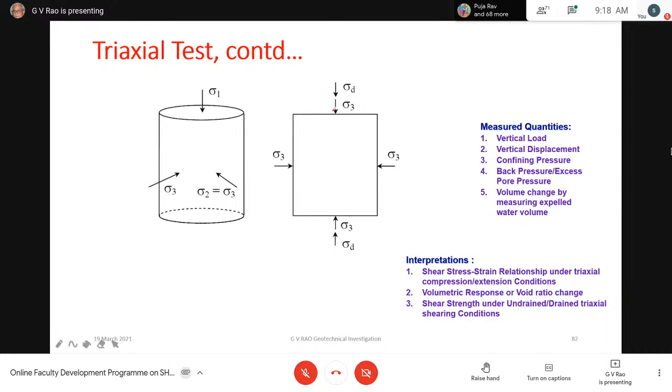So that is what we are going to look at basically. So when trying to do that now, we defined last time that we are going to have 3 combinations actually. The 4th combination is not feasible. You can think why the 4th combination is not possible.

But then, in the first stage now, we are going to have this undrained condition. That means pore pressure is still there, excess pore pressure is still there. And the second stage is going to be that we are not going to allow consolidation in the first case either. So this is what we are referring to as an undrained, unconsolidated test.

Results of which I have shown you yesterday, but I will also show again. That means till the end of the test, the pore pressures which are developed during phase 1 and phase 2 are going to remain there only. So this is a totally undrained case. Obviously, this is going to apply only to a homogeneous saturated clay.

Okay, that's very clear on this now. And obviously, we can't easily make a specimen of sand in the laboratory. So this applies essentially to clay conditions.

The second kind of test is, of course, what we are going to do in the first phase. We are going to first apply the cell pressure and then allow the excess pore pressure to be dissipated. So the sample is consolidated. We give adequate time for that. And then after that, we are going to apply the additional axial stress under undrained condition.

What we mean by this now - we are going to close the burette or the volume change measurement device and not allow the pore pressure developed in the second phase to dissipate, and we may choose to measure the pore pressure or we may not measure it. So it becomes a CU test when you're not measuring pore pressure. It becomes a CU bar test when we are going to measure pore pressure.

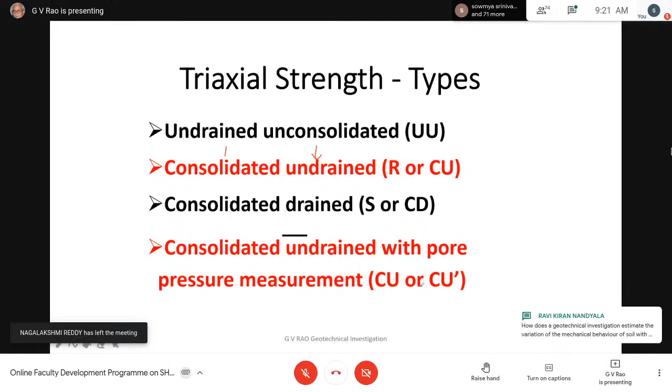We will recap again. We are going to use the Mohr Coulomb concept. We have a linear relationship between sigma and tau. What are we defining? We're defining the slope of this line by the equation tau f equals c plus sigma tan phi. C becomes the intercept on the vertical axis, the tau axis, phi is the angle we are measuring, and sigma is the pressure or stress we apply.

What I mentioned yesterday and repeat again is that these are only strength parameters, not a reflection of actual cohesion which may occur in clay - that it sticks to your hands - while phi is not meaningful in clay. These parameters are strength parameters determined under different drainage conditions, and we should not relate this to the friction between sand particles or the adhesion between clay particles.

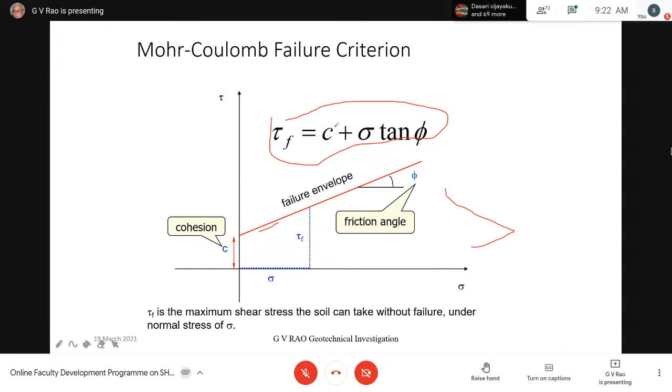It is only strength parameters, determined under total stress conditions or effective stress conditions. That's what we remember - I think this is the most important criteria. C and phi are measures of shear strength, designated as strength parameters, either effective strength parameters or total strength parameters.

Obviously, if the values of C and phi are higher, it means higher shear strength. That is obvious. So the first case we determine is what we call saturated clay, let us say.

In this case, we are going to initially assemble a sample at a confining pressure of 50 kilopascals and conduct the test, plotting the failure value of sigma to get a circle like this. We can conduct a second test at a confining pressure of 100 kilopascals and get another circle, and a third test at 200 kilopascals. So this is the result.

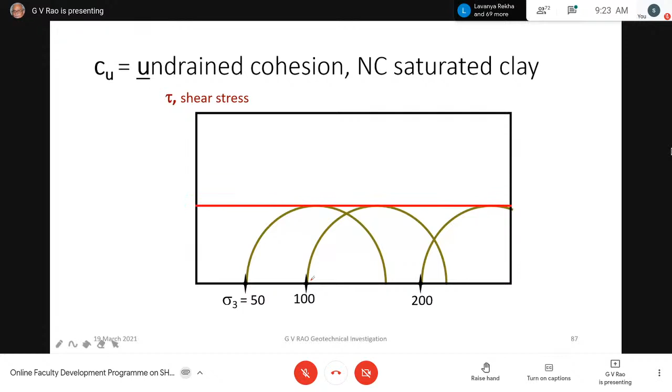Mind you, in this UU test, we are not measuring pore pressures - everything we measure is in total stress conditions. So in these total stress conditions, we plot a common tangent between all the circles. This common tangent is the failure envelope. First, it's horizontal, so the value of phi is really 0. Then there's an intercept on the y-axis, the shear axis, so the intercept is given as C.

Now the second thing we thought about was what would be most accurate when we conduct an unconfined compression test on the same kind of clay. Once you apply no confinement - no cell pressure, zero - you are testing at sigma equals 0.

When you conduct such a test, surprisingly we get a circle of the same diameter, which means the intercept we get is simply a value of Cu, which is the same in all cases. So that is what we remember always - conducting this test naturally gives a phi value of 0 and C is positive.

We also mentioned that we can conduct a similar kind of test in the field using a vane shear test. The vane shear test is also done in a few minutes - we rotate the vanes and find out the strength. There too, whether laboratory or field, we're not going to do any more consolidation; whatever is there in the field, we take as it is.

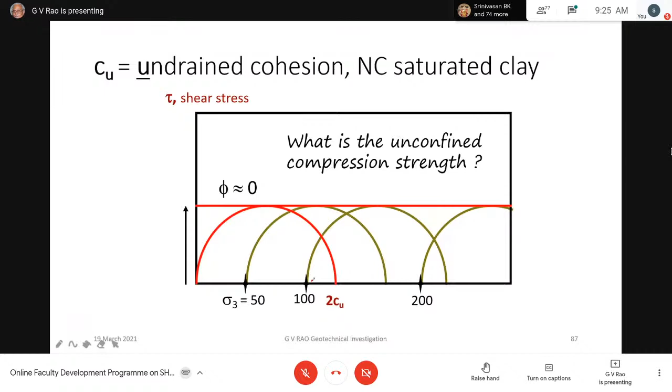We're going to run the test in the field, meaning in the natural condition. That means the effective overburden pressure remains whatever it was there. The test is done in a few minutes, so there's no chance for any excess pore pressure to dissipate. So that gives us the value of C under undrained conditions - that is the undrained cohesion.

This can only be, as I said, total stress parameters. So this is very clear for us now. For saturated NC clays, meaning normally consolidated clays, phi is equal to 0, and tau peak is going to be Cu. In the early generation, people used to call this value S, capital S. That also we use when you go to bearing capacity, so that is very important for us.

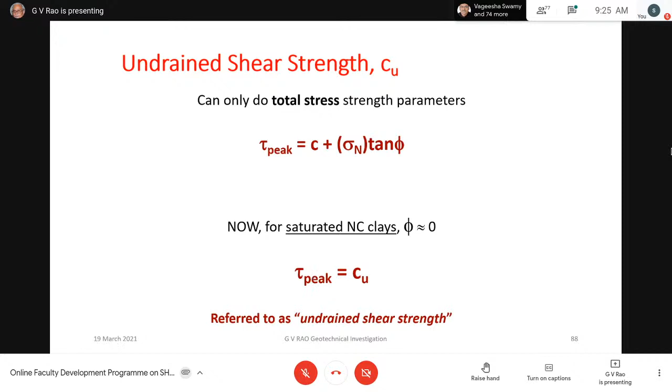Now on the same kind of soil, if you conduct a similar test, but a CU bar test - when you conduct a CU bar test, the first phase is consolidated, second phase undrained. That means in the second phase pore pressure is generated, but it's measured. When you plot this under effective stress conditions, we find circles of different diameter.

Why does this happen? Let us say we had a confining pressure of 200 kilopascals, and during the test there is pore pressure generation. But before the test, before phase 1 is complete, the sample got consolidated under 200 kilopascals, here at 100 kilopascals, and here at 50 kilopascals. So with higher confining pressure, consolidation is over in the first phase itself, and the second phase only has excess pore pressure generation. We can plot these values perfectly, and then we find that the common tangent - the Mohr-Coulomb envelope - is going to be a line.

In this line, we find that the intercept is going to be nearly 0, for the same soil, same clay soil. So what we find is that there is a phi now. Can't we say that the clay has no cohesion and there is a phi? We should not think that clay doesn't have friction, because C and phi are only expressing strength parameters - this is what we have to remember.

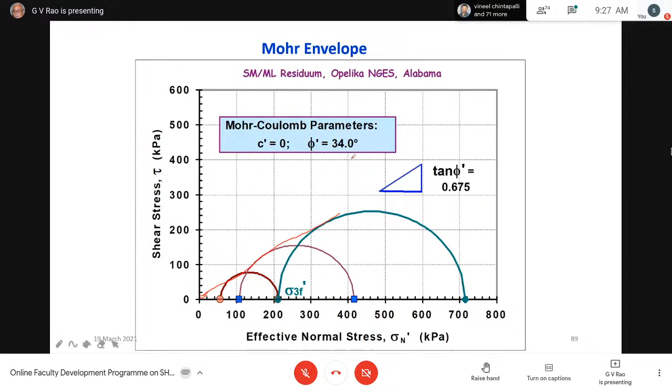In the same way, we can also plot the total stress plots - no problem with that, but it comes out different. So this is what we are going to remember: for the UU test, we have got Cu and phi U equal to 0. For the CD test, everything is drained only, there's no pore pressure, no excess pore pressure there. So we are going to get only effective stress parameters called C prime and phi prime - this is very important for us.

To repeat: granular soils will not have any cohesion, C is 0 and C dash is 0. In unconsolidated undrained test in terms of total stress, phi is 0. And for normally consolidated clays, C prime is 0 and C is also equal to 0.

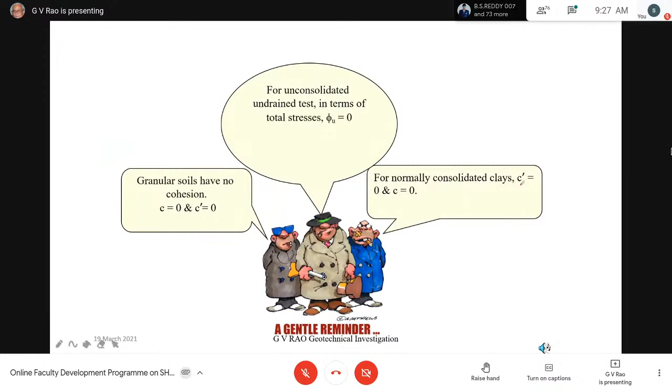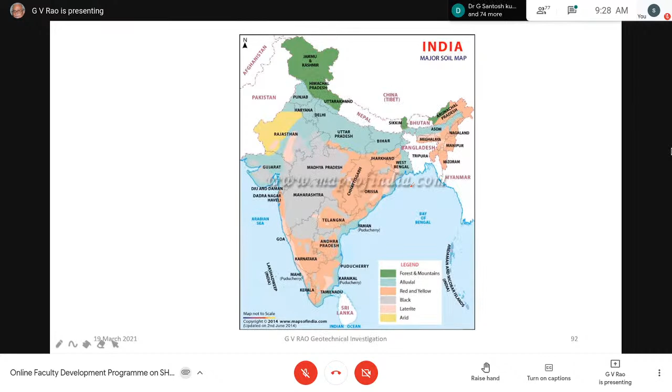What we should remember is that in our huge country, we have different kinds of soils. Each one of you should have some exposure to the properties of the soils in your region, and you should make an opportunity to bring samples to the laboratory. Just to see for yourself whether you get consistent results or not, you should try this for the soils around you at different depths and variations, to get a physical feel of what we're trying to talk about.

In the beginning, people used to think that we will just drill a hole in the ground, send the soil samples obtained from the hole to a laboratory with standardized apparatus served by what people call conscientious human automatons - meaning they are doing the test perfectly, there's no problem doing it. But then we just collect the figures, introduce them into equations, and compute the result.

Unfortunately, as Karl Terzaghi, our father, says: unfortunately, soils are made by nature and not by man, and the products of nature are always complex.

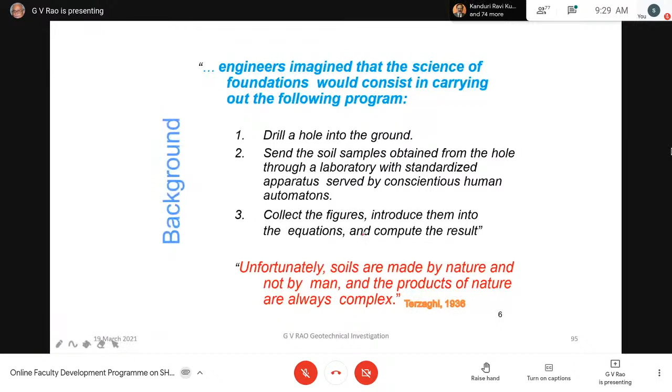Just merely doing the test mechanically and putting these values in the equations will not make any sense at all, because there are several things between the cup and the lip. I can show many instances where things were perceived in a different way. It could be our own analysis of things, our own way of thinking, or it could be that we have to keep our eyes and ears open about the performance of different kinds of structures in our area, about which we'll talk more as we go further.

From these values, we are trying to obtain what kind of load we are going to have for a foundation structure of different size, different dimensions, different depths. We have very crudely seen that when the load is distributed very near the bottom of the column, or very near the surface, it's called a shallow foundation. We'll have clear definitions of that anyway. But as a rule, the shallow foundation is going to be more economical.

For example, if some of you have gone to IIT Delhi, all the major structures up to the 7th story were all on shallow foundation only. Today you can't think of a 7th story structure on a shallow foundation, but that was the situation. I think nowhere in IIT do we have a deep foundation - they are all just shallow foundations, even the major structures.

The other thing I want to share with you: when I went there in '75, in the main institute area there was a huge car park, well paved. After some time, probably in the early 80s, the institute decided we are going to have a library building there, a 4-story library building. But every library building is always heavier than a normal residential building because the books are very heavy - the stacks of books make it very heavy.

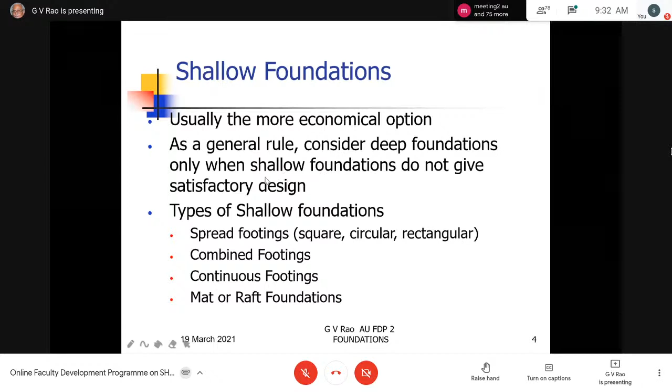This is something we have to do. So before we take a call on what kind of foundation we are going to have, we ought to know the depth of the natural strata that was there and how much is filled or how much is cut. As a general rule, we consider deep foundations when shallow foundations are not giving a satisfied design. So in a shallow foundation, students usually look at some structure like this, but it could be a rectangular foundation, it could be a strap foundation, or it could be a mat foundation.

For each one of these cases, we get different kinds of parameters. For example, in this case, there's a relatively high ratio of soil resistance to structural loads because the area is more. The resistance, the allowable bearing load is going to be more actually, since the area is more.

When the actual bearing capacity of the soil is smaller, we naturally adopt a much wider foundation, a raft or mat, whatever you want to call it. These conditions come about due to resistance, but they're also common. For foundations of tanks, we have ring foundations too.

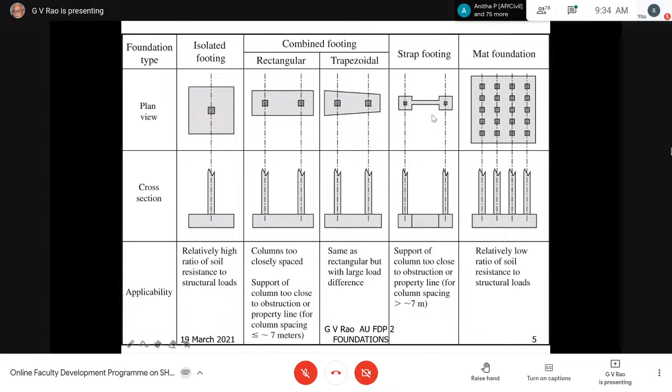So the kind of structure, the ground conditions, and availability of land next to your boundary are going to influence the kind of foundation. We often look at isolated footing or continuous footing like a compound wall as the common things, but these so-called uncommon things are also very important, and sometimes we need to use judgment in deciding the actual bearing capacity.

So the foundation choice is going to be guided by the subsurface soil, the groundwater conditions, and also structural requirements—all three are important. We can know the subsurface soil conditions and groundwater conditions by doing investigation, but the structural consequences are equally important for us.

That means before giving a decision on the recommended load which the soil can take at different depths of foundation, it is important to understand what the architect or designer of the building is planning. Has he got individual footings, continuous footings, a raft, or a deep foundation in mind?

For example, we may think, as we did at IIT Delhi, that even a 7-story building can be on a shallow foundation. But the architect or designer might have something else in mind—a deep foundation. Once they have deep foundation in mind, while I'm only thinking shallow foundation, my depth will be restricted to maybe 1.5 times B. But if deeper foundation is needed, we need to go much deeper.

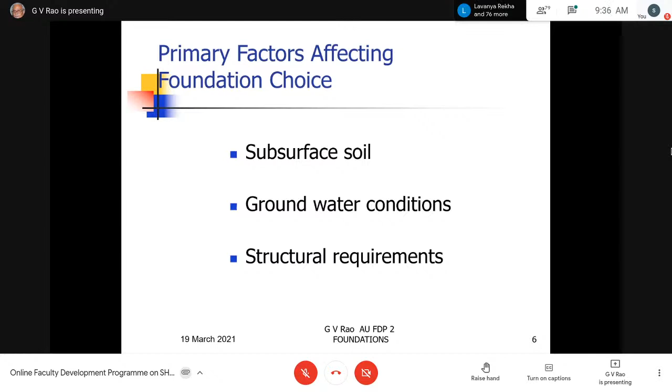What's more important is, once the actual user of your data decides upon deep foundation against your wishes of shallow foundation, are we going to go back to the site and do investigation again? No. So we have to know the mind of the architect or client, and the structural requirements, like how close the spacing of columns is, whether there are heavier columns than normal, like staircases or lifts. These things ought to be known well before the investigation, and definitely before giving the allowable bearing pressure.

We know that three things are most important for a successful foundation. From a pure soil mechanics viewpoint, bearing capacity and settlement—these are two things we all do. But the third factor, the number of other factors, these are called nebulous factors.

For example, if you're looking at a structure like a pump house next to a canal, river, or pond, scour may become important. If you don't consider scour, you are gone. Similarly, there could be godowns like cold storage, which is going to completely change the soil profile—it's going to be frozen. So we get a different kind of issue when we open it up. The point is that this third element is nebulous.

Yes, in all our books now, we got a lot of conditions. I will also show you the conditions given by our IS codes. But this list is never complete unless you are able to understand the total situation in and around the proposed structure and the experience of the neighborhood. This is going to be sometimes more crucial than determining your bearing capacity.

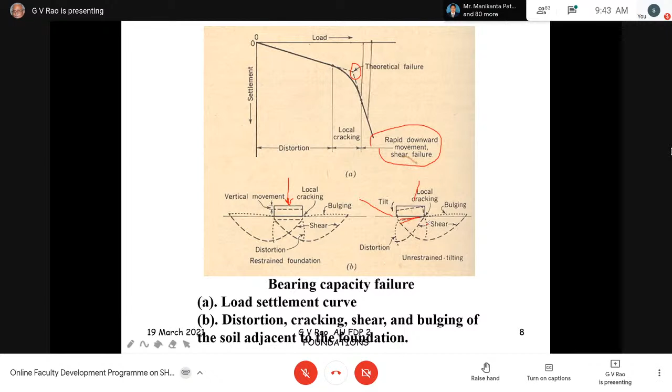And what is the final result of all this analysis is going to be that this wedge which is going to form, which is punching into the ground, is assisted by the friction around this wedge portion, and also by the vertical component of the earth pressure which is going to be generated by this entire zone, what we assumed as a failure zone.

So it is clear that this failure zone is divided into two zones. One is radial shear zone, and then a linear shear zone. Linearly there is no problem at all, but the shape of this radial shear zone is what we can imagine, and different shapes can be imagined. We can imagine this inclination to be different. So all the theories differ in this only.

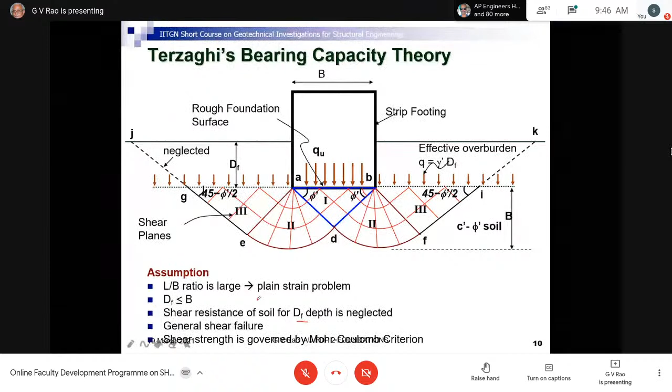So there is general shear failure because the entire soil around the depth and width participates in the load distribution of the columns or the foundation structure, and the shear strength is governed by the Mohr-Coulomb criterion. So with this is the foundations. What has he done?

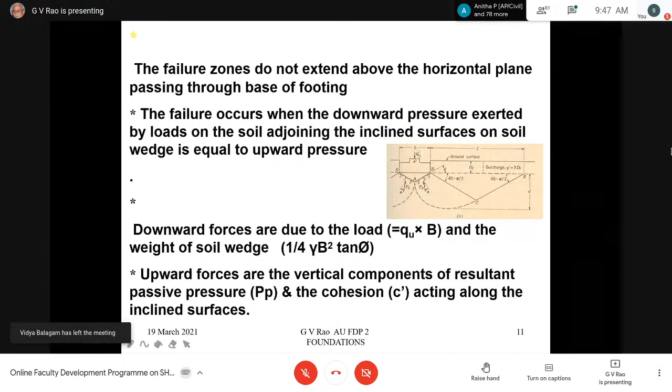This is what I have repeated. So the same thing we have tried to do: the failure zone doesn't extend beyond the horizontal plane, and failure occurs by downward pressure exerted by the loads that I mentioned. So finally, we can just draw the equation for the load bearing capacity because we have two zones now.

We are talking of the vertical component of the earth pressure, which is PP, the passive earth pressure into relevant angles, and then also the cohesion along the conical or wedge portion, and the appropriate values are taken after the geometry is set up like this.

We know that this length AB, this side, can be decided by the width of the foundation as well as the angle which you are trying to pick. So we put this equation for the load bearing capacity like this, for the total foundation.

This PP value, the passive pressure generated by this entire zone, is divided into three components. This is the most significant contribution which Terzaghi made, which is followed by all other theories, whether it be Terzaghi, Vesic, Balla, or Hansen, everybody followed that. So this PP component is divided into three terms.

One is PP gamma, which is due to the weight of the shear zone ABEC, that entire zone we are talking of. Then Ppc is the cohesion along this. And then Ppq, q always referring to surcharge, is the term referring to the surcharge here. So the passive pressure components are three: due to the weight of the zone, due to cohesion, and due to surcharge.

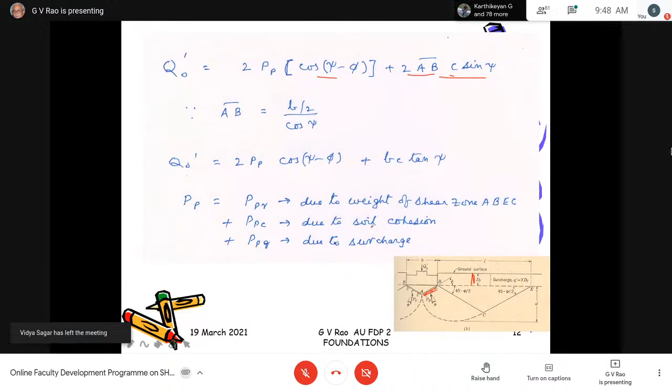If you put those things back and divide to get the unit bearing capacity, divided by the ultimate bearing capacity and divided by the width, you find we divide the same thing into the same components, and finally arrive at an equation simplified, for mathematical purposes, as gamma B by 2 into N gamma plus C N c plus q N q.

So now we realize that these values of Nc, Ngamma and Nq actually represent the passive pressure, and they truly depend on, one, the angle of friction of the soil below the foundation, and also the geometry of the failure zone.

Okay, and by the way, they are determined, and you find that they are obviously dimensionless. So the differences between different theories occur because of the various shapes assumed, shape of this entire zone, and shape of this entire thing, the angle here. Now people have assumed different values.

Brown has done a lot of work in this area. We're not going to use this equation directly, but Q ultimate is equal to QC for cohesion, then QQ for overburden pressure, and Q gamma for unit weight of soil. So the same thing is represented in a different way. This is what we have to see.

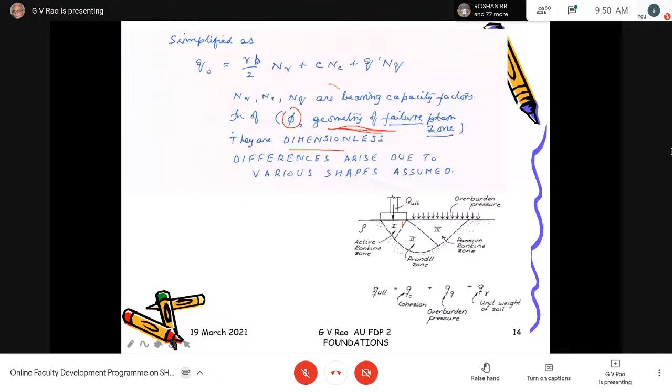There are three components for the ultimate bearing capacity: due to cohesion, due to overburden, and due to the weight of the soil. It's important to note equations like this exist. These are simplified slightly, but the NQ and N gamma, NC are functions of only phi. Of course the shape also matters, but I'm just showing the original equations, which give you a feeling for why they are functions of phi and the shape.

Here are Terzaghi's equations. The other thing we'll keep discussing is that you can always plot these bearing capacity factors versus the angle of internal friction, or angle of shearing resistance as we call it. What is it we are going to find out?

We find that if you think of the undrained case, undrained case means only C is there, so it is only C and Nc, nothing else. So you find that now, for both C and phi, this entire curve comes into picture.

When is the soil going to have both C and phi, effective C prime and phi prime? When the soil is actually over consolidated, which is very rare. If the soil is over consolidated, we'll have effective cohesion and effective friction also, so the angle of friction will come into picture.

The range of these values are also given here. Most commonly for the undrained case, it is this value we are going to use, because the undrained case for normally consolidated soils is always going to have no phi at all, mind you this. This is going to be a very uncommon situation - an over consolidated soil is uncommon.

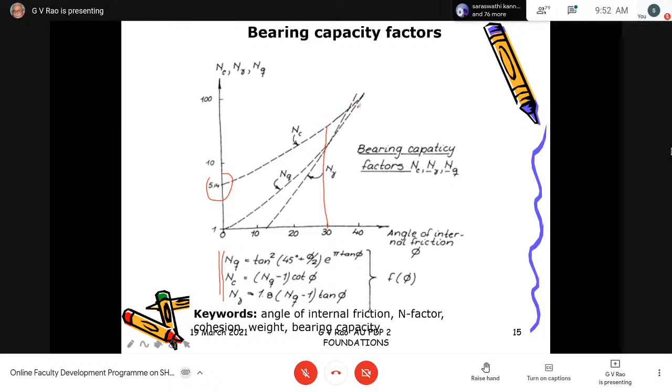We'll see this. So this equation here is derived for a strip footing. We have seen that. So for the strip footing, we got the same equation written in a better fashion. We got effective stress conditions shown in this case: C prime Nc plus gamma Df and NQ plus half B gamma and N gamma. So we've seen what these things are now.

And what Terzaghi suggested, of course all of you know, he suggested values which are different. The coefficients here are different for square footing and circular footing. So instead of 1 here, he used 1.2 for both of them, and instead of 0.5, he suggested 0.4 for square and 0.3 for circular footing.

How did he suggest it? Just by experience. Based upon experimental results, he has done this kind of calculation. Obviously, today we know that they refer to the shape - we call them today shape factors. So shape factors were introduced for the first time. He didn't bother about eccentricity.

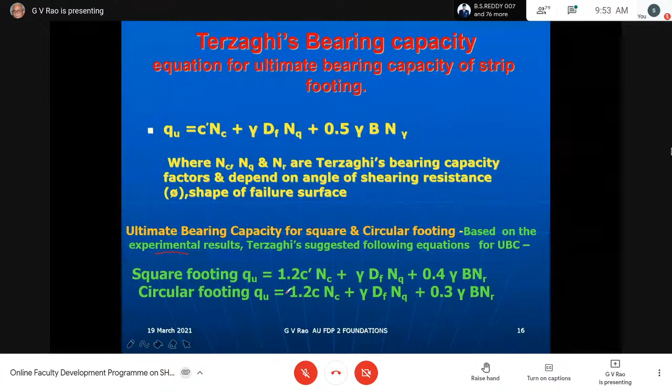He didn't bother about other things, but he did bother about the shape. He found that the equation used earlier was not suitable for square and circular footings, so he modified them as far as shape is concerned. The most important aspect to recognize is that the calculation of these things is very simple actually.

This is what is going to be most important to us. By assuming just 30 degrees, by any kind of test converting the SPT value into this and ultimately reporting 30 degrees, is meaningless, because even half a degree change is going to improve the bearing capacity factors significantly. This is what you have to realize clearly.

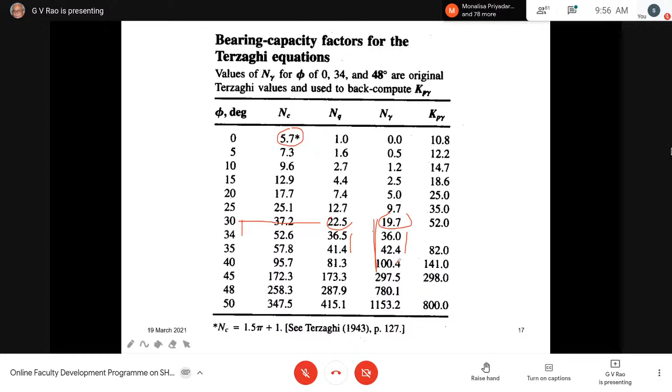The second thing brought out by Vesic much later is that we have seen the twin shear failure zones. That zone actually takes up the entire soil into the limiting equilibrium condition, because the bearing capacity theory is a limiting equilibrium condition. He said this may not always occur, so there are two more conditions specified: local shear and punching shear.

So what did he do? In general shear, we get the entire zone having the failure planes. But in local shear, the zone is not completely formed, it seems to be settling and developing only in a nearby area for these failure planes. In the case of general shear failure, we find there's a kind of peak value, and then it may reduce and become constant.

But here now, it seems to be settling disproportionately. We also have punching shear, which we will see later in more detail, very similar to this. Maybe it actually completely goes down, not mobilizing anything in the neighborhood. So here also the failure, ultimately, could be almost leading to failure now.

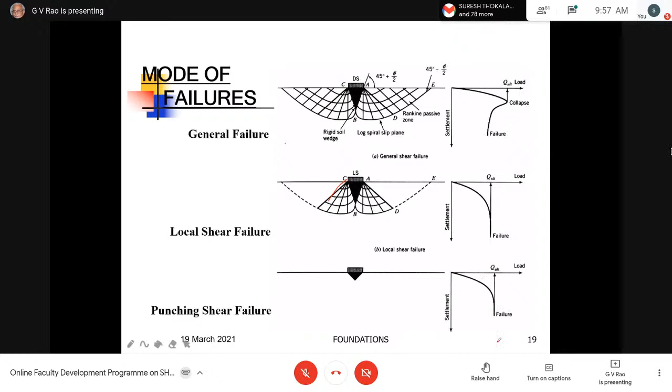Here, the entire soil is fully in the load bearing mechanism, because these failure zones are fully developed. Here, they are not developed, only restricted to this zone, and here restricted to only this zone. So this is the difference between the different footing tests he has done.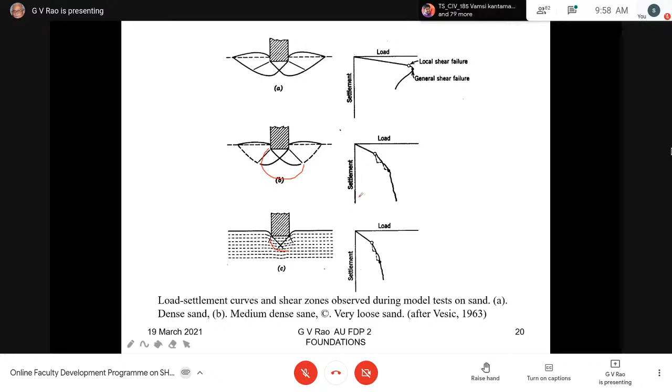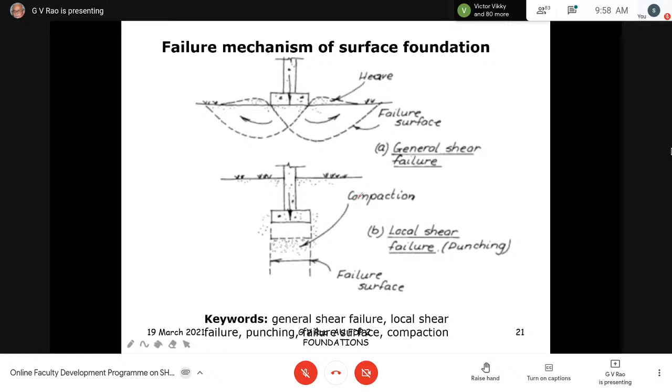Based upon this, he gave a theory. But today, we consider both the local shear failure and punching failure as the same kind of condition. So as per our IS code and our understanding, we consider only general shear failure and local shear failure, which includes punching also, meaning the foundation is settling disproportionately without mobilizing the soil on either side completely.

That is what is specified by the IS code and followed by everybody else now. So for this condition, he said we will not use the full value of C. We actually use the value of C, which is only 2/3 of the C we calculated in the laboratory. Same way, the tan phi value for local or punching shear failure is only tan phi equal to 2/3 tan phi, phi being what we got by testing. And this correction roughly is going to be 2/3 of this.

So for loose sand and silt, this condition applies. Now this is very generic also, it depends upon many kinds of things. What is suggested is something like this - what you observe and what is suggested is like this.

On this axis we have the relative density of sand, and on this side we have the relative depth of foundation, that is D over B, where D is the depth of the foundation and B is the width of the foundation. Under conditions of high relative density, this ratio D/B is going to be around 5. These cases are all going to be general shear failure, then local shear failure, and then in the zone where relative density is very poor, naturally it's punching shear failure.

So we are looking at this kind of estimate today. We don't talk of all of them now, we go to direct decision making.

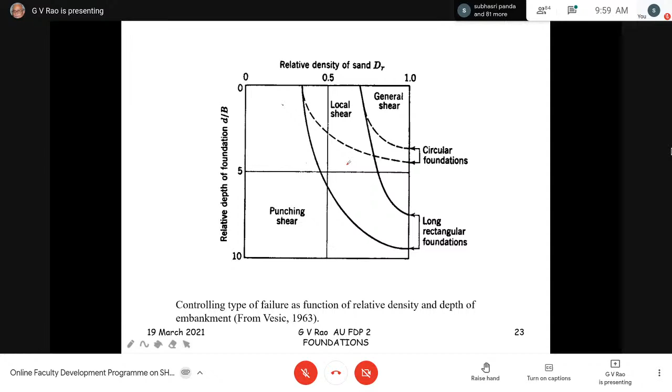The other important thing is about the presence of water. Water table can be anywhere when you conduct the test, because you may conduct the test conveniently in summer, when the water table is quite deep, and then in monsoon time the water table may rise. So if water table is rising, there is a question of change in the effective unit weight - are we going to use the normal bulk unit weight, or the submerged unit weight? This problem always comes up.

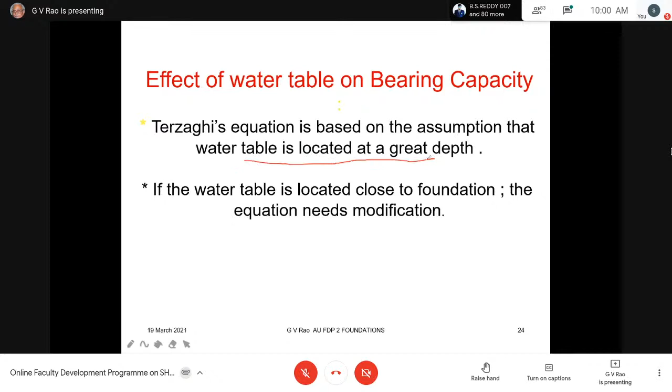So in the beginning, we have to remember that Terzaghi's equation is based upon the assumption that the water table is located at a great depth. That is very important for us to realize. So the correction for this is very easy. If the water table is very deep, at a depth greater than the width of the foundation, naturally there is no influence.

If the water table is, let us say, around here - what do you mean by this? This parameter which we use for this soil will be different, it will be a submerged unit weight. And the parameter we use for the soil above, the surcharge, is going to be the same bulk unit weight. If the water table is somewhere in between, we will have to do adequate correction, trying to linearize it, assuming the changes are linear. But fundamentally what we are trying to do is recognize that if water table is down at a depth equivalent to the width of the foundation, naturally there is no limit effect at all.

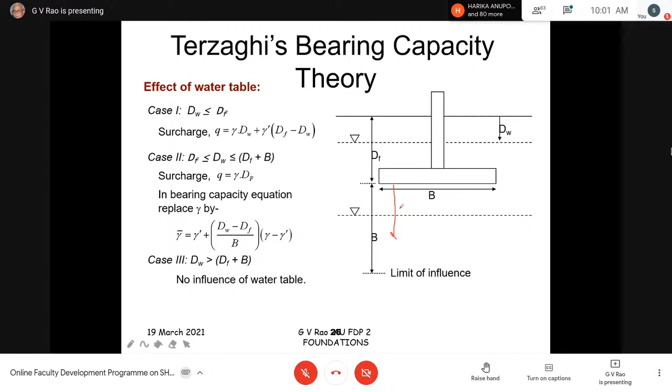That means we use no correction for water table in that case. If the water table is at the foundation level, we use a submerged unit weight for the parameter in the half gamma B term, and for the Nq term we use the full weight. If the water table is anywhere in between, we use linear interpolation for the density, as given by the equations. These are the correction factors we will have used.

The other most important thing coming out of this is that what we get from these equations is what we call the ultimate bearing capacity.

Ultimate bearing capacity means the gross pressure at the base of the foundation at which the soil fails in shear. That means the pressure we can apply at the depth we are assuming. We assume only in the beginning; the depth is assumed initially. The minimum depth we know is 1 meter, so we assume the foundation is placed at 1 meter depth now.

So what load are we going to place on this foundation? Clearly, this weight will include the weight of the soil, because we have a column and the neighborhood is going to be filled up with soil only. So first we consider the effect of that soil, the overburden above the base of the foundation, which is included in the ultimate bearing capacity.

So net means the additional load you can place, which means from this ultimate bearing capacity QU, we subtract the overburden pressure, gamma Df. That is called QNU, net ultimate bearing capacity.

So then the safe value comes when you divide this net ultimate bearing capacity by the factor of safety, assuming between 2 and 3.

Okay, then what is the gross bearing capacity now? That means how much you can place naturally. Whatever we got out of the net bearing capacity, plus this overburden pressure, which is going to be there. Now you have to be quite careful about what kind of foundation you are going to use. I'll come back on this issue later.

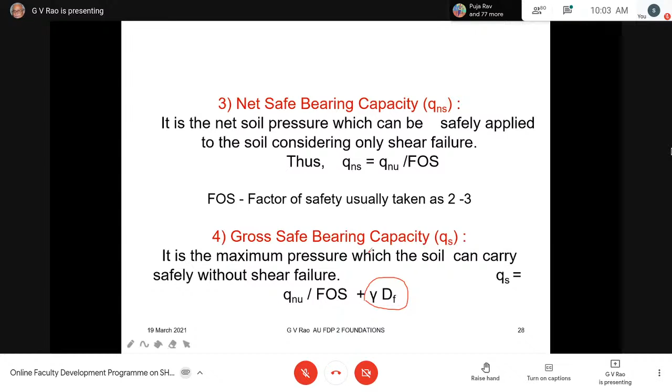Right now, the gross bearing capacity means how much load you can place, given by the ultimate bearing capacity, net bearing capacity divided by factor of safety, plus the surcharge you are going to have on the foundation. Now that is bearing capacity.

The second part, which we'll consider in more detail in tomorrow's lecture, is the net safe settlement pressure. That means it's the pressure which the soil can carry without exceeding allowable settlement.

So mind you, what is the parameter now in this case? The allowable settlement. The allowable settlement is decided by the codes, but the final call is made not only by the code but also the client. The client can think, 'I will not allow that much settlement as given by the code, I will be stricter or more conservative.' So it's between the client and the designer, but within the limits of the codal practices.

So what is the net allowable bearing pressure now? It is going to naturally be the smaller of the two. That is what it says.

One thing we should remember is this value, considering both the net safe settlement pressure as well as the so-called bearing capacity, whatever term you use—that has always been misconstrued. The correct term is net allowable bearing pressure. People also call it allowable soil pressure. But unfortunately, the code now calls it allowable bearing capacity.

All this is going to be confusing now. What we mean is that we are going to give a pressure which you can place on the foundation. People loosely call it bearing capacity, but the moment you say capacity, it only means bearing capacity, that is, the ultimate divided by the factor of safety, giving the net value, with or without considering the surcharge part of it.

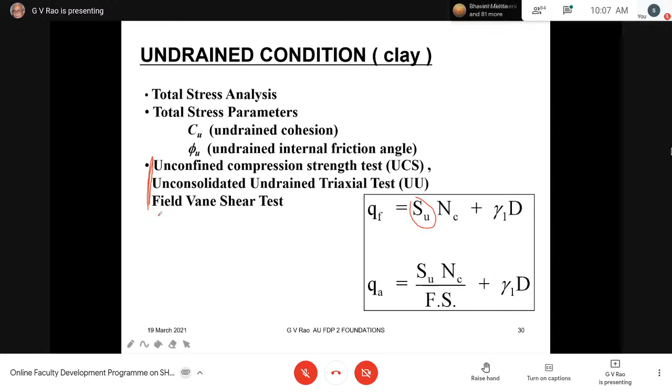We already mentioned that phi is going to be 0 in most cases. Researchers with more experience and more testing recommended that we not limit the value of NC to 5.14 only. It actually happens to be a function of the depth and width of the foundation, and also depends on the shape, square or strip. This change was made - the NC value can go up to 9. So it changes from 5.14 as initially suggested by Terzaghi, up to 9 per these complex corrections which are usually followed.

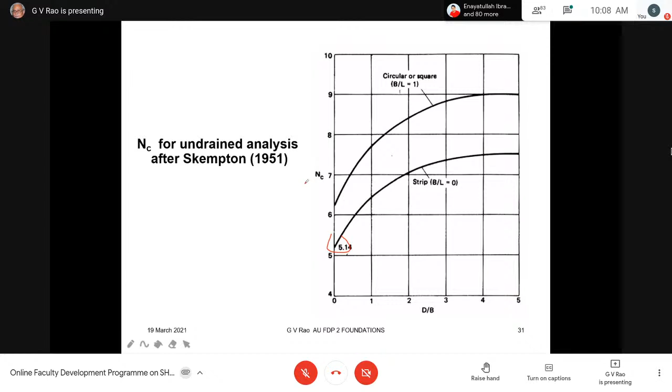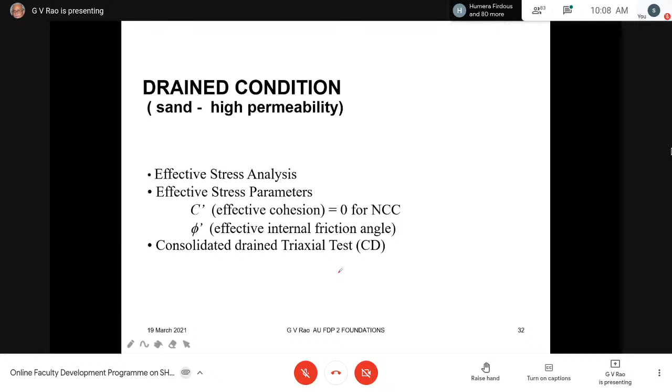This is also recommended by IS 6403. We will come to that when we see the actual drawing from the code. So this is one convenient way, particularly for sandy soils, wherein you can directly get the bearing capacity factors Nc, Ngamma, and Nq from the corrected SPT value.

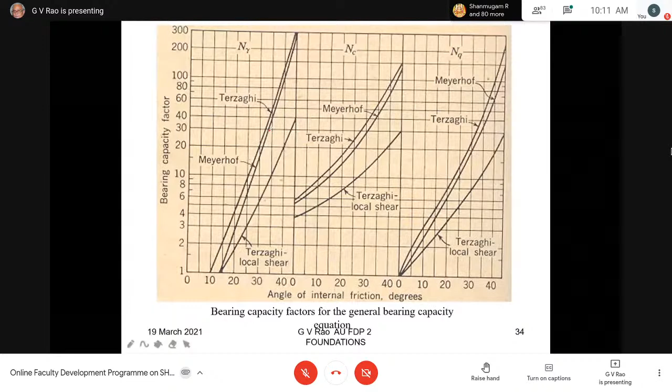Meyerhof has used some assumptions, we'll come to that. His values are slightly lower than those recommended by Terzaghi, because the assumptions Meyerhof made were slightly different, and that's why the small change is there.

Once you look at that, the difference is too small, but you can also get copies of all of them from Bowles' book, from that page. So we have Terzaghi's '43 method, Meyerhof's method, Hansen's method, and Vesic's method.

You find that Vesic is probably the first one, and along with Hansen, we find that the Meyerhof values and the Vesic values are somewhat similar. Nq and Nc are very similar, but Ngamma is different.

Out of all of them, the Hansen values consider various factors, which we now call shape factor, inclination factor, and depth factor. So instead of using different terminology for the most general case, Hansen has given us the various kinds of factors in one go. That is the advantage basically.

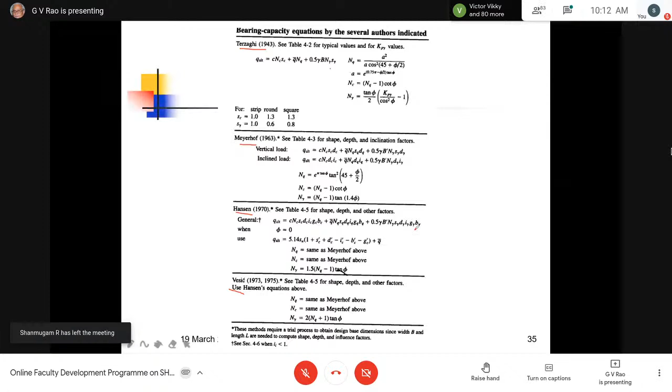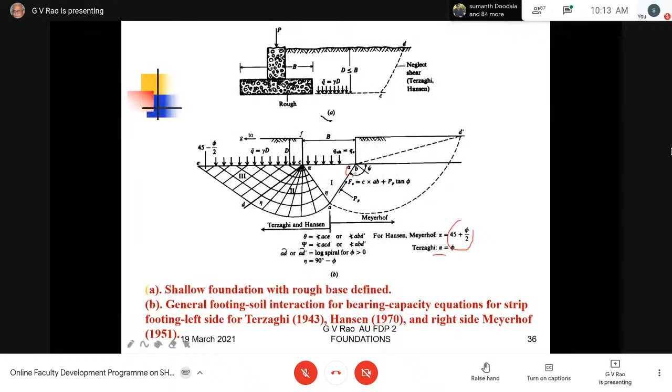Through this process, we get the factors, starting with Meyerhof and Vesic, and shape, depth and inclination factors. The advantage of the generalized solution by Hansen is that he has given us not only shape, depth, and inclination factors as functions of the shape and size of the foundation, but more importantly all of them are functions of phi. He has also given us ground factors and base factors.

We're always imagining that the base of the foundation is horizontal, level. Now, it may not happen in certain conditions, like industrial structures, where the foundation needs to be tilted. Also, the ground is not always horizontal, it may be inclined. So this inclination of the ground and inclination of the base are considered. There are simple equations given to us for the shape, for the depth, for the inclination, and also for the ground inclination and base inclination. That's why they become the most generic kind of factors.

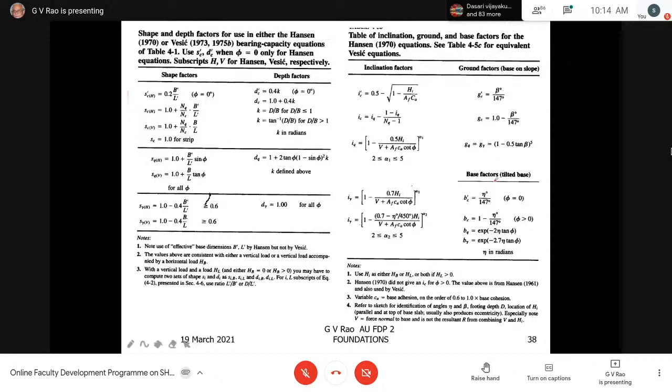We'll spend a minute on the difference between these series. We find that the value of NC and NQ are the same for all three methods. What are the three methods? Meyerhof, Hansen, and Vesic. Hansen is what we are proposing to use anyway. So Meyerhof and Vesic values are similar to Hansen's equation. NC and NQ are functions of phi.

If you look at N gamma by Hansen, N gamma by Meyerhof, and N gamma by Vesic - that means V for Vesic, M for Meyerhof, and H for Hansen - let's take the common example of 30 degrees. For 30 degrees, the value of N gamma by Hansen is 15.1, by Meyerhof is 15.7, and by Vesic is 22.4. Let us go higher, to 34 degrees. The value by Hansen is 28.7, by Meyerhof is 31.1, and by Vesic is 41.

So what are we actually choosing? Hansen obviously is going to be quite conservative, meaning it gives us lesser values. That is one reason why people preferred Hansen. Also, as I told you, he gave us the various kinds of factors for all possible applications.

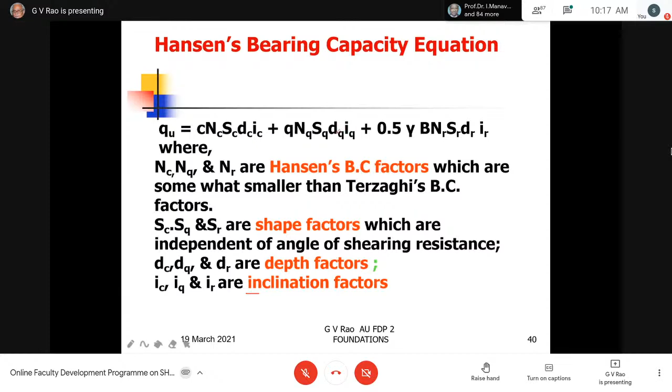So these factors are meant to correct the value of the bearing factors, the basic factors. These are in addition to the values you got from the table I've shown you, the NC, NQ, and N gamma. So for each terminology we got shape factor, depth factor, and inclination factor related to all these things. I have given you the equation for how to determine these earlier, and they also give the corrections for inclination.

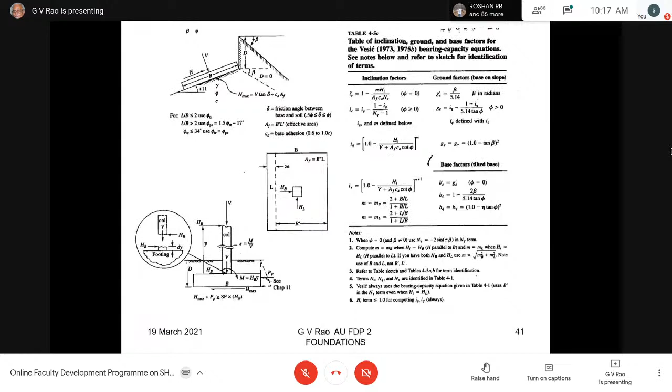As I told you, this inclination is given, and this eccentric loading is given here - indirectly it means inclined load only. In IS 6403, we adopted the same general format, which is good for us. It's more generic, but the IS code has given its own bearing factors. So let's not get into comparison - I just gave the comparison earlier to understand the differences between the various series.

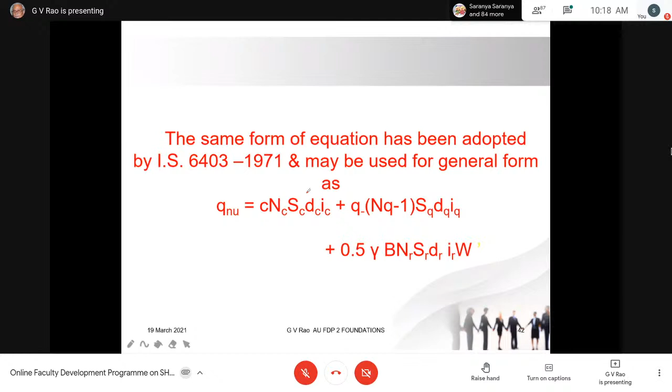So we are back to the same basic equation - meant as equation because the format of the equation is what we are using. Now we are correcting for these factors - shape, depth, and inclination - for each one of the three bearing factors. And of course, we know what we do for slopes, I have mentioned earlier. We will not have much time to get into this, but I will do other things now.

The other important point I want to cover is that the soil is going to bulge once it's near failure, when the entire soil is mobilizing its own capacity. So what is the effect of the outward movement? The bulging you find on top of the ground surface. This is given by two factors: one is the extent up to which this is going to come out - F is this extent. And depth is the depth of this failure zone - D is the failure zone, and F is the zone of influence of this failure zone seen outside. This is a function of angle of internal friction.

And what is it you find now? F over B is a function of angle of friction. You see that for 30 degrees, what is the value of F over B? It is 3. That means it is going to be influenced by 3 times the width of the foundation, up to 3 times this side, 3 times that side.

And if the angle of friction increases, let us say to 35 degrees, this value becomes 4. If the angle of friction goes to 40 degrees, this goes up to 5 also. So 5 times the width of the foundation is influenced.

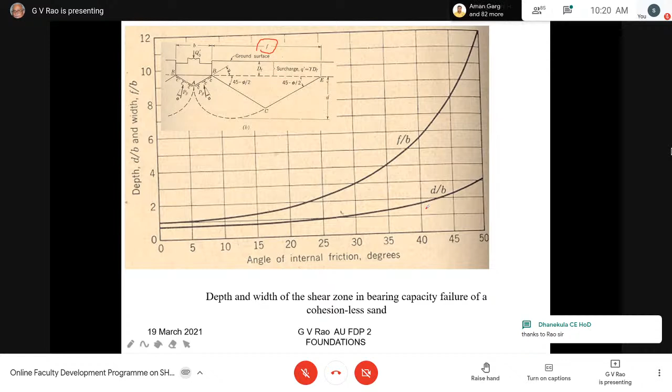If it is 35 degrees, we find that this value may become 1.3, that means more depth is influenced. If it is 40 degrees, it is nearing 2, that means twice the width of the foundation influences the depth. So both in the depth and the zone of influence, the angle of friction has very serious support.

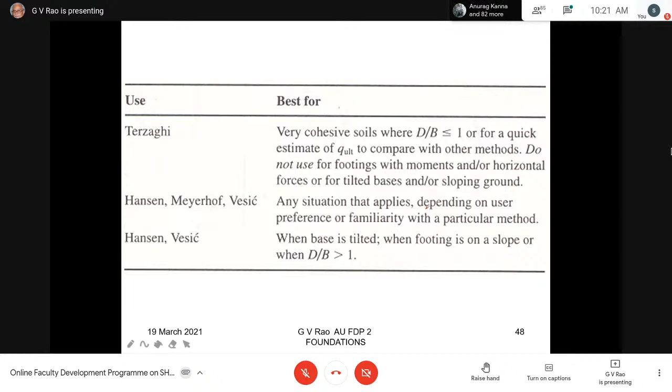So again, these are generalities you find in different books in different ways, but we have to follow essentially the code. So I will not get much into them, but you should use some of the most advanced books to understand which theory is going to be better for predicting the correct result.

But before going to that, there's an excellent table summarized by Professor Bowles. What he has done is collected experimental data on model tests, model footings by Milovic and by Muhs. Milovic has done this for this kind of situation, say 4 tests by Muhs and 4 by Milovic. The dimensions he has given are depth, width, length, and gamma, phi, C for all these 8 tests.

Both, he has given the ultimate value which was obtained by the laboratory test. What he did also is compare from this data regarding depth, width, length, and gamma, phi, C, he predicted the ultimate bearing capacity by Terzaghi's method, by Meyerhof method, by Hansen method, by Vesic method, and Balla's method also. So when he tried to do that, what do we get?

We find that for this case, Terzaghi's method gives 9.4, Meyerhof 8.2, Hansen 7.2, and 8.1, 14 here. So what we find is that Hansen's value is most conservative. In the second case of test, this value is much lower than what we got in the field, in the model test. The model test is 10.8, so probably it's lesser than 14 but more than the Terzaghi value.

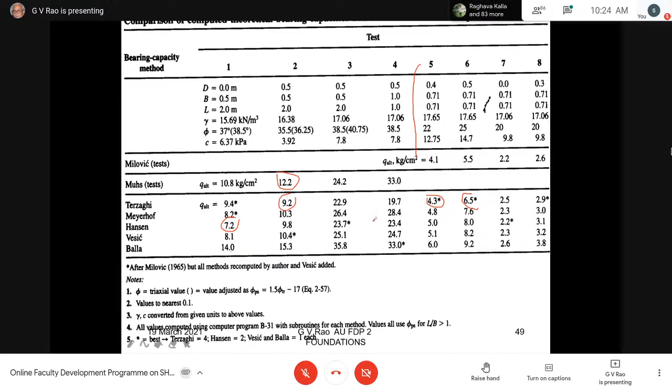So you have to go back and study this page from the Bowles book. The result of all of them is that none of the theories is actually able to predict the value correctly. So there are variations in the predictions also. They will not necessarily compare with the actual model values, and these are still model only. In the real case, there will always be some variation. So it's very difficult for us to say that this theory is the best and the other is not correct. This is mentioned very clearly in the opening statement by IS 6403.

I thought I will put it for your observation. The bearing capacity of foundations is needed for dimensioning the foundation of any structure. Several methods are available for determination of bearing capacity of shallow foundations, and this standard gives some of the methods which are commonly used for the purpose.

Comparison of results shows that when each of the various methods is applied to different problems, no one method consistently gives higher or lower values of allowable bearing pressure. The designer must therefore regard the methods as aids to design, which cannot replace the critical role of engineering judgment.

I think we ignore this. We always say that the standard has to be applied mechanically, but the standard itself says no one method is necessarily correct. So unless we're able to see that the field condition is going to be synonymous to the theory we're going to use, sticking to the code itself is not necessarily right. This is what is said.

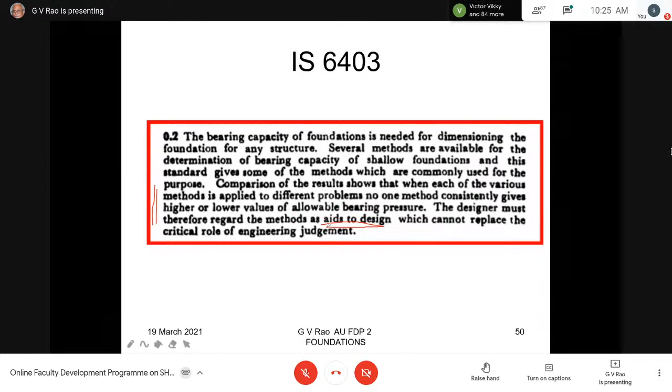Comparison of results shows that when each of the various methods is applied to different problems, no one method consistently gives higher or lower values. This is a very critical statement. The designer must therefore regard the methods as aids to design. They have not given the final verdict that you have to use this particular method. So please keep it in mind.

So the rest of it follows, of course, very clearly for sandy soils. And we just see the same equation we already discussed now, including local shear failure, whatever we discussed, the same thing is there. The factors given are not necessarily following these methods, but since the IS code has given us this, we are going to follow these methods only. So for our application, we are just going to use the bearing factors as given in IS 6403.

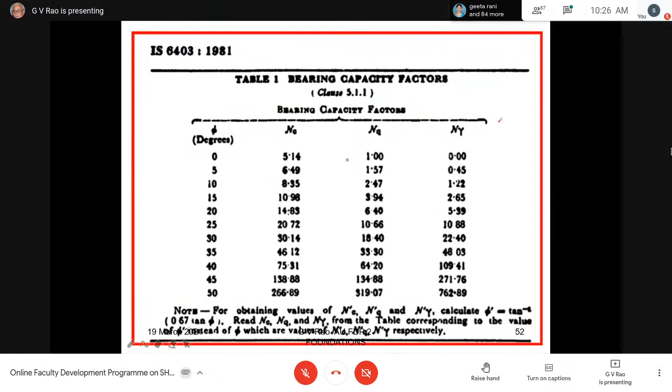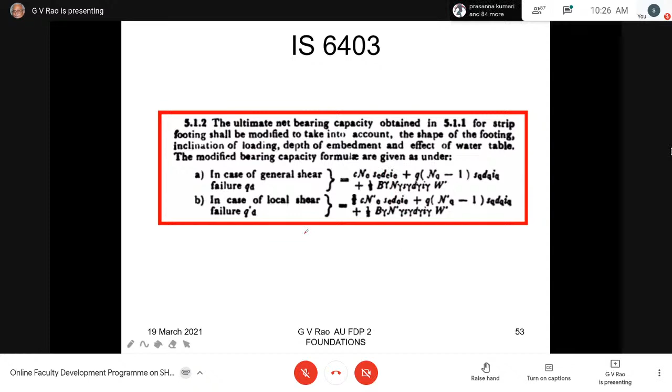Then, of course, for strip foundation, they now refer to Hansen's factors: SC, SQ, IC, that means shape factors, depth factor, inclination factor, in the same way as they refer to both general and local shear failure. And then the factors they have given are called simplified factors from the Hansen series. One is the detailed factors, and the other is the simple factors.

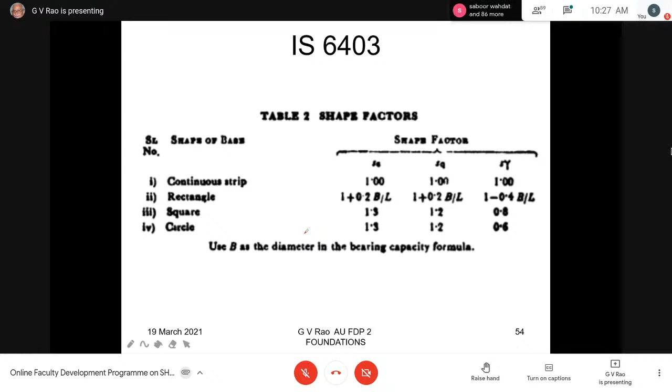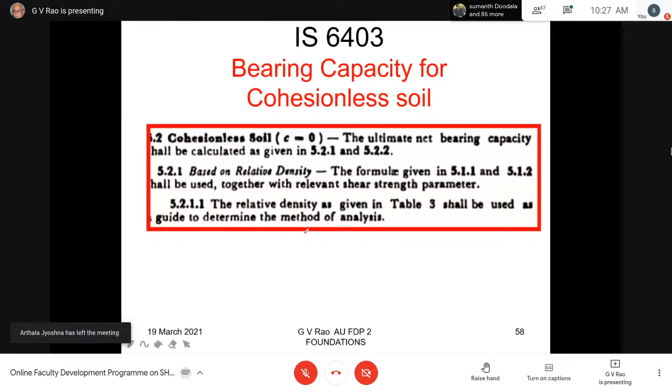And then for cohesionless soil, obviously, this is taken into consideration, given as a kind of aid to us. So we say relative density greater than 70%, less than 20%, and 20 to 70%. So for void ratio, they give indication less than 0.55, greater than 0.75, and between 0.55 to 0.75. So we define this as dense condition, loose condition, and medium dense condition. So when the relative density is more than 70, void ratio less than 0.55, we take it as dense and then take it as general shear failure.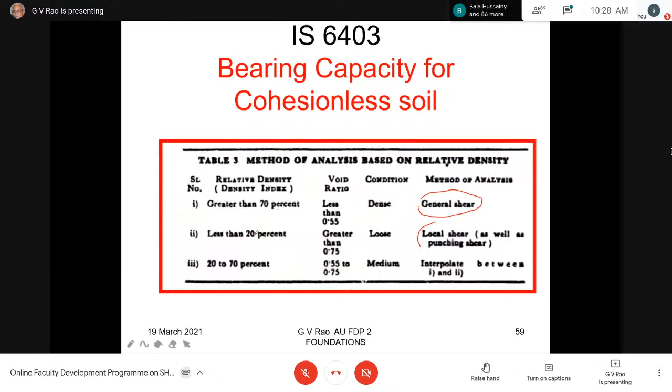In the worst condition, we take it as loose sand and apply for local shear as well as punching shear. And if it is between these two, 0.55 to 0.75, or 70 and 20% relative density, naturally we interpolate.

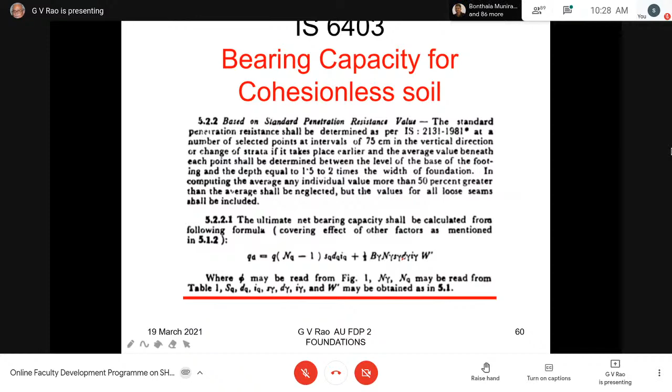That is the recommendation by the code. Further, we can use the SPT values directly, as I said, using the curves given. Other codes also give corrections to these SPT values, both for overburden pressure and for relative density. These are well known, and we're going to use a slightly different approach.

What's important for us to realize is that the overburden pressure correction is very high near the top. Why is it so high at the top? The value goes to almost 2. The correction value is 2, meaning twice the measured value is what we get for the corrected overburden value. Obviously, this applies essentially for sand only.

For granular soils, what happens? At the top, the confinement is less. As you go down, confinement increases because of overburden pressure. At a certain depth, the influence is felt maximum, and below that we don't find anything else. So near the surface there's no confinement, and the correction factor is 2. As you keep going down, the correction factor ultimately becomes nothing. That is what we have to remember.

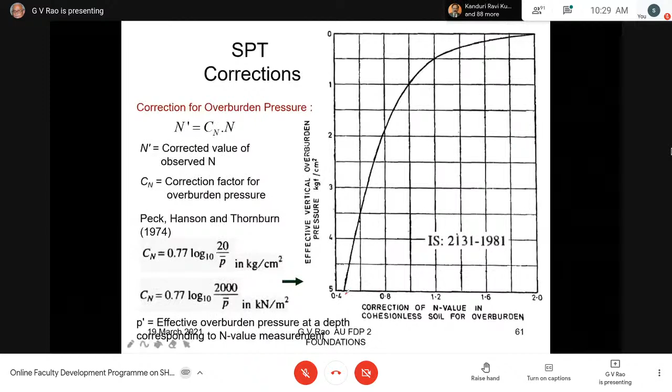The correction factor again becomes normal. So fundamentally we have to remember this, and there are equations giving this.

Dilatancy correction, you know very well, nothing more to say on that. It's applicable when below the water table, for fine sand and silts, we apply this correction. What we try to do is, for any value more than 15, we reduce it by half. So whatever curves are given for relating the SPT value with phi, the same thing is given here also.

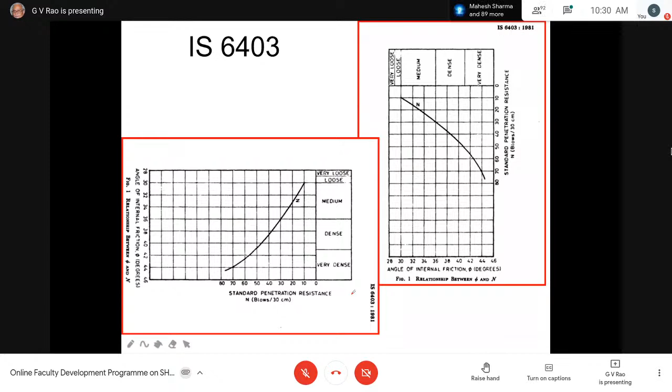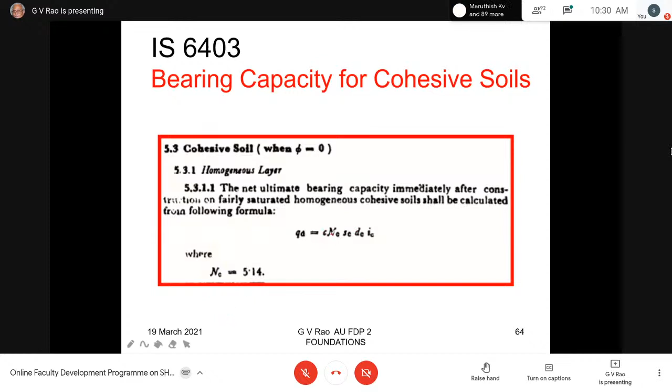For cohesive soils, again the same thing, CNC, and we use the Nc value 5.14 and the factors as defined earlier by Hansen and given in the code. And if the soil is layered, not homogeneous, naturally we take the weighted average.

So long as the values don't differ by more than 50%, we use this weighted average up to two-thirds of the depth, up to two-thirds of the width of the foundation. That is one thing we can try to do.

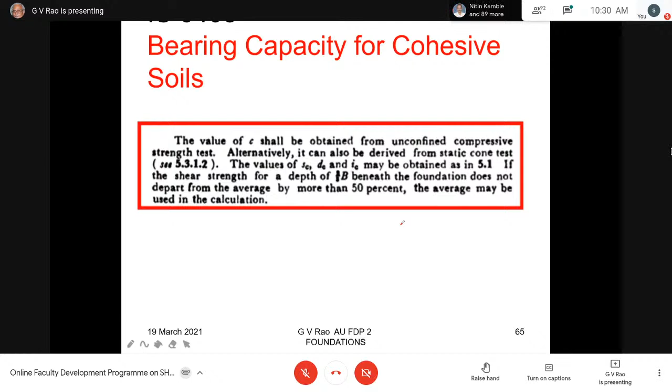The terminology which I mentioned is already there, except that they refer to it as allowable bearing capacity. So that is where the terminology differs: the net intensity of loading which the foundation will carry without undergoing settlement in excess of the permissible values for the structure under consideration, but not exceeding the net safe bearing capacity.

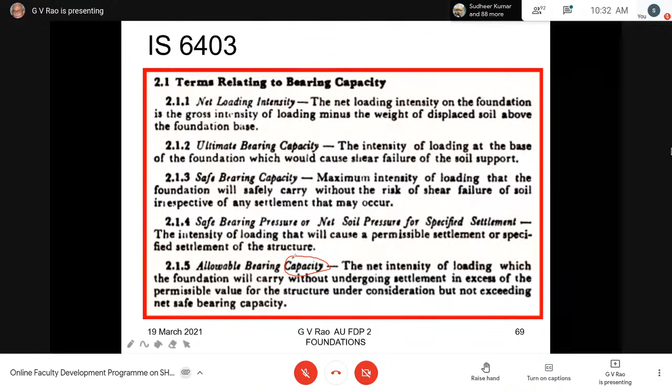The terminology we suggested is not going to be capacity but pressure, because capacity somehow mentally makes people think of bearing capacity only, devoid of the settlement aspect. If you use this terminology, it's going to be good actually, but anyway, the code uses its own terminology.

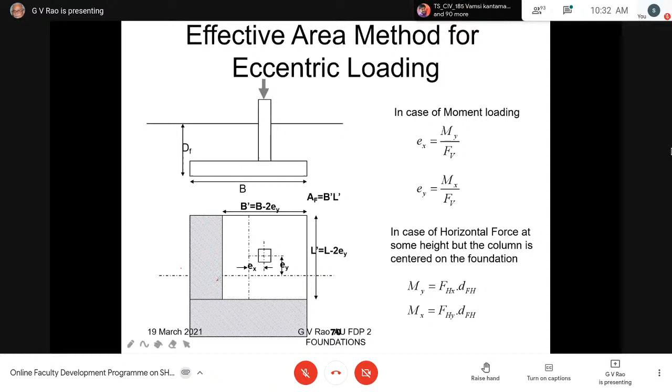This is what we said about eccentricity. We know very well that if it's eccentric on both sides, what is important for us is that we are going to lose all this area. This area is not considered for determining the actual load bearing capacity by this methodology. So this becomes a waste, but this is required from structural considerations, and that is what is going to be important for us.

So finally, the so-called allowable bearing capacity, as I said, we wanted to call bearing pressure, is the net ultimate bearing capacity as obtained earlier, divided by suitable factor of safety, that becomes net safe bearing capacity. And then the net soil pressure shall be taken as either of the following, whichever is less. That is exactly what we decided, and that becomes now the safe bearing pressure or allowable bearing capacity. So we should consider all of them now appropriately and use the other codes also.

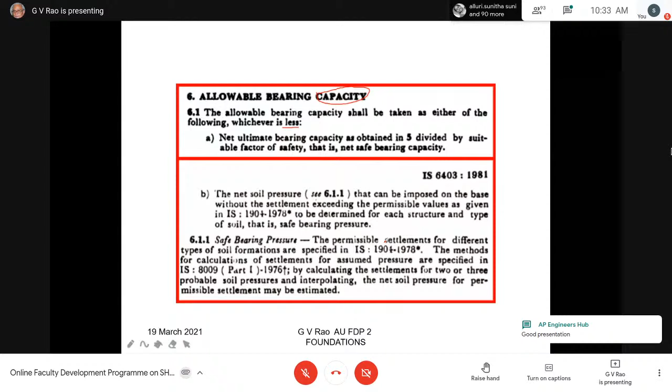So finally, from the foundation design viewpoint, this is a very general observation: for clay, the so-called allowable bearing pressure depends both on bearing capacity and settlement. It's very difficult to say that it's a function of bearing capacity only or settlement only. It depends on many aspects of the consolidation behavior and the strength behavior of the clay, and of course overconsolidated versus normally consolidated clay, which we will discuss more in detail when we go to settlement.

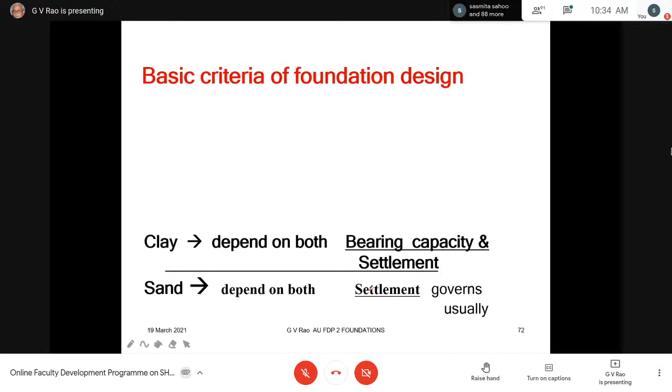Then for sand, probably the settlement governs more. Though the settlement is going to be immediate, we don't consider that and we take it as only a bearing capacity issue. But actually settlement governs, because the immediate settlement that occurs is going to be more. But then it happens during construction, so we are not so much worried about that. So it becomes primarily a function of only phi, and of course size and shape, but settlement theoretically governs usually.

So that is the thought for now. We will actually move to the next step of determining the so-called allowable bearing pressure, and we will consider that in tomorrow's session. So at this juncture, have you got any fundamental doubts?

Karthikeyan? Yes, sir, can you hear me? You have got some more doubts? Yes, sir, actually two things.

About the triaxial test: when you mentioned consolidated undrained and consolidated drained, you mentioned the consolidated undrained or R method. That's good terminology, but we don't use that now, people used to use it back then, so don't worry about it. We call it CU or CU bar now. Consolidated undrained test without pore pressure measurement, and CU bar means with pore pressure measurement. R and S terminology: S means slow, R means rapid. It was good terminology, so don't get into that, because we are considering this one.

So just one slide I want to show also. This is a project we have done at Gangavaram Port in Vizag, for a bridge approach basically. But the point we are trying to say is that this soil profile is realistic.

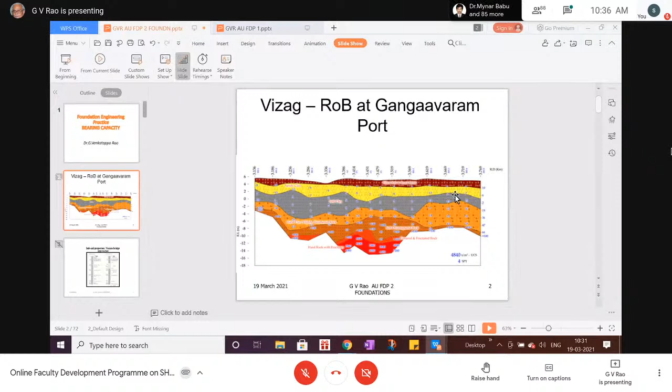If you are going to have this building, let's say a 100-meter long building, if you are going to construct a school or college or some large functional hall, we find that it is going to be based upon maybe this kind of strata or that kind of strata. So there will be a lot of different settlements occurring out of this. Total settlement, differential settlement, and varying with time also is going to be an issue. And of course, bearing capacity is an issue.

And if you are able to see this, for different depths the soil is different. This soil is black cotton soil actually. If it's a bridge approach, yes, we got good material at 24-25 meters, and in between there are layers of sand. It's otherwise clay, soft clay actually, as you can see in this slide.

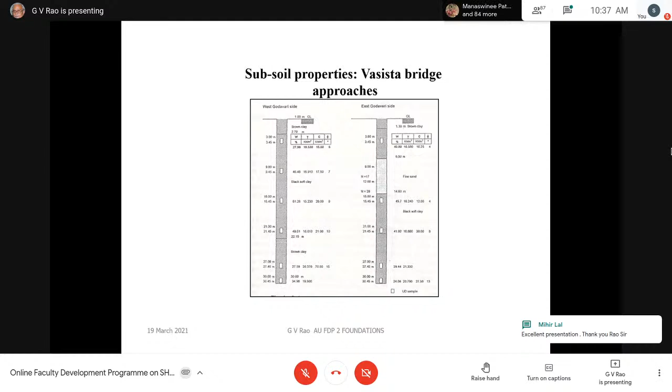There are cases when buildings have settled as much as one floor, but nothing happened to the building as such. It depends on connections and things like that. So the issues are always based upon the type of structure we are making, its utilitarian function, tolerance level, aesthetics, and the basic foundation we design. This is going to be critical for us to understand.

I just want to repeat the statement I made: this is not simply inputting test results into some equations. That's where we stand by whatever Professor Madhav always quotes - foundation engineering is an art ultimately. We have to play between all these variables to be a successful designer. And this comes from your own fundamentals and observations of the soil and the behavior of structures. Unless we do this, you can't just bring equations or my PPT into the classroom.

Some of you said, please give me the PPT. A PPT is made by us, individually. It is not simply cut paste from the book.

I had experience in 2-3 different institutions in the state also, and the authorities ask them to make a PPT. So they simply cut paste from the book and then say, this is my PPT. That is not a PPT - the equations are there anyway, anybody can read it. But what more are you going to bring to the equations? How do you get the background of that?

This is the purpose of my presentation always - yes, you can always read the equations and fill up the gaps. It's not an assignment, it's not a tutorial. What you're teaching is not a tutorial exercise. Somehow the emphasis in examinations also is becoming tutorial kind of thing only - just fill in the values, convert the units and things like that. That means they're not getting the hang of the foundations actually.

You teach advanced methods, but still don't know how the behavior of the soil is going to be. So teaching all 5 methods is important, maybe at the PG level to understand, maybe to do research on that. Is it required today for practice by engineers? That is the crux of the entire issue. Okay, any other doubts by anybody?

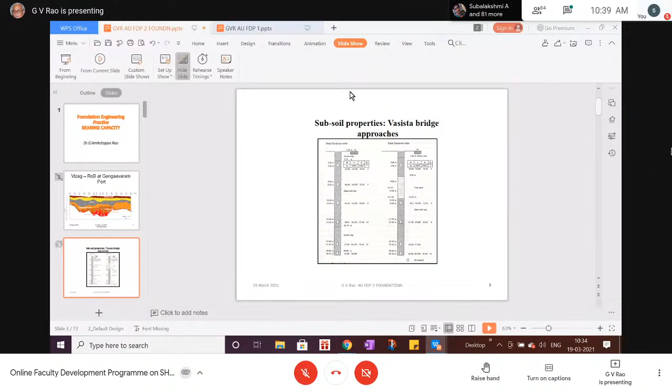So good morning, sir. Good morning.

Sir, in one of your slides, you've been showing the difference in N-gamma values obtained from Terzaghi, Hansen, and Meyerhof theories. Both Terzaghi and Hansen also assume the same angle of inclination as 45 plus phi by 2, but still there is a difference in the values of N-gamma. Can you explain us - what about other assumptions? What about the shape?

And today, for you to teach or for you to practice, these are not relevant now. If you want to research in the area, yes, you need to do research. But if you are only teaching UG or PG students, we have to only see what they have done - that is the main thing now.

And also probably at research level, are all the theories going to be good for us to think about foundations on black cotton soil, or for us to think on hills? Or are the theories to be modified further when you get different structures, or when you think of coastal erosion? So those things are becoming practical.

We are doing a lot of work on hill areas now. Okay, I've shown you 2 slides - I skipped over that because I think indirectly Professor Keshav may be showing more detail of foundation slopes also on rocks actually.